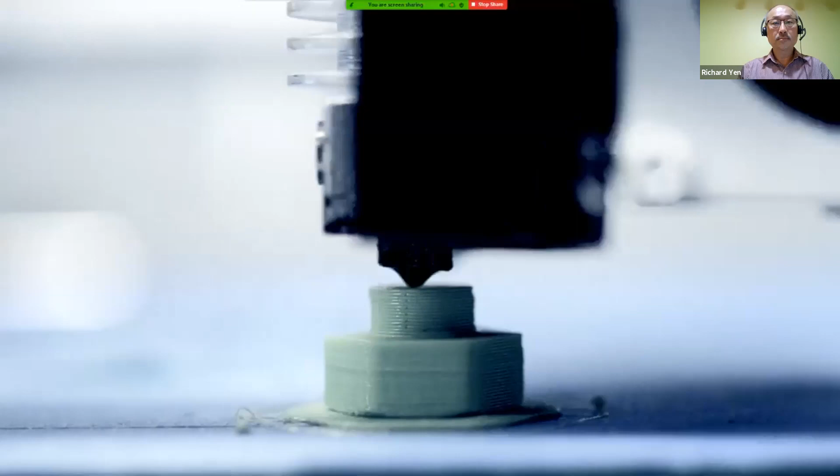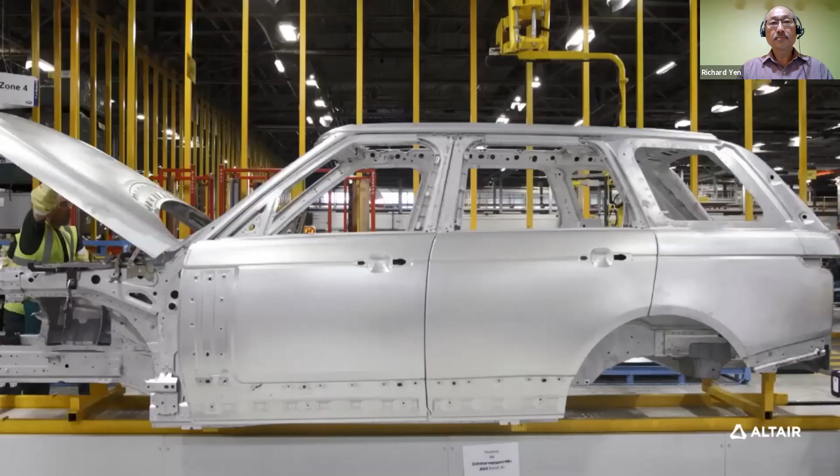Much like the title Enlighten, because it enlightens us on new technologies. They're like a peer to me and to my engineering colleagues, so it's even more of an honor to have a group and a company that's made up of engineers give us an honor like this. It's important for automotive companies to reduce vehicle weight because we want to give customers cars that they want from a ride and handling point of view and an enjoyment point of view, and also cars that meet the sustainability challenge, get better gas mileage and better CO2 reduction. We consider the Enlighten Award as the Oscar of lightweighting. We've been following that for years. We are going to brag about this to all our customers, putting it on our website. We're very proud of this. We had the CEO here today, so we're going to really brag about winning this award.

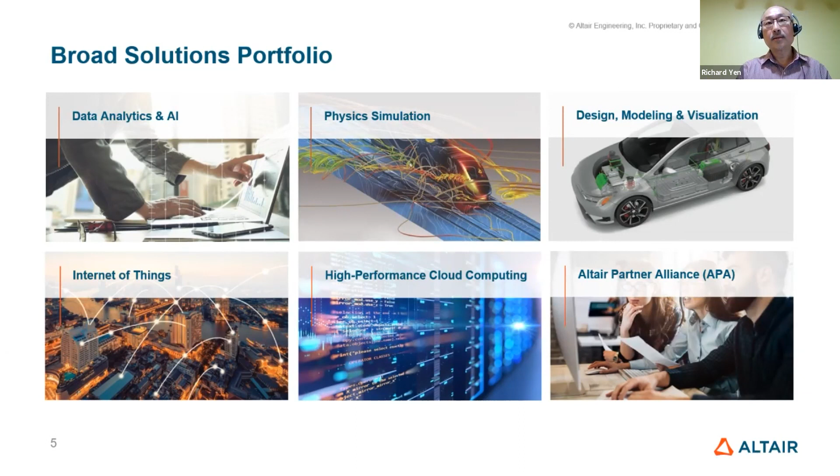So for the Enlighten Award this year, we're entering our 9th year for the Altair Enlighten Award. Altair has been very happy collaborating with CAR, using independent judges to judge the entries. So I want to remind everybody here, the date is May 31st.

That's when entries close, and then we will go through the judging and review cycles. CAR is going to help host the judging panel discussions and select the finalists.

And then we will present those awards at CAR's MBS on August 4th. So what's the difference for this year's award? We understand that through the years, the Altair Award has already extended beyond just vehicles, into modules, enabling technologies, and the future of lightweighting.

We understand that for OEMs to achieve their goals, it requires supplier support and people who have a vision for lightweighting solutions. So we're adding the module category, enabling technologies, and the future of lightweighting.

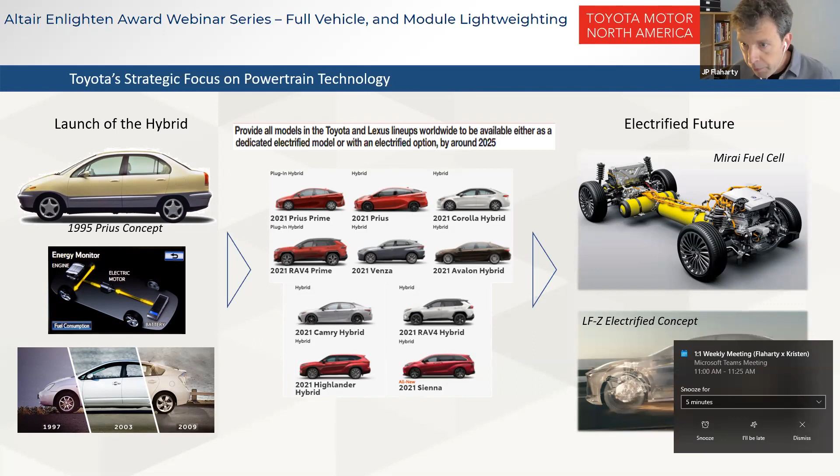If we talk about weight reduction and some achievements, we have the first Altair Enlighten Award that we won in 2017, for the resin liftgate for the Prius Prime, the plug-in version of the Prius. The technology is a CFRP inner panel with glass fiber reinforced molded SMC structure that's 40% lighter than equivalently sized aluminum. More importantly for us, it gives the customer benefits: unique styling with aerodynamic advantage, and mass offset that allows a larger battery and thus longer range for the driver.

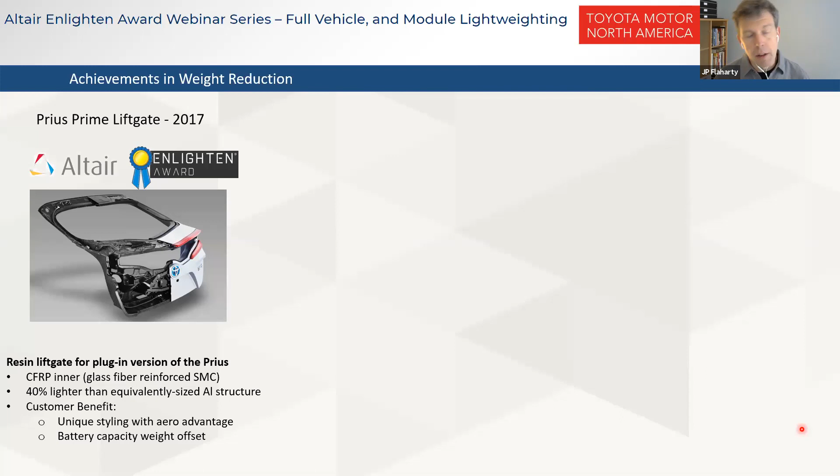In 2020, we again won an Altair Enlighten Award, this time for a project developed here locally within TMNA R&D, with strong collaboration with our supplier partner BASF. This is the resin seat frame for the Sienna minivan that utilizes a glass fiber reinforced resin structure that's 30% lighter than the prior steel structure. We were able to manage cost through considerable reduction in part count, integrating many subcomponents into the structure itself. The key advantage for the customer is ease of use—it's very light and easy to fold and unfold these third row seats in the new Sienna.

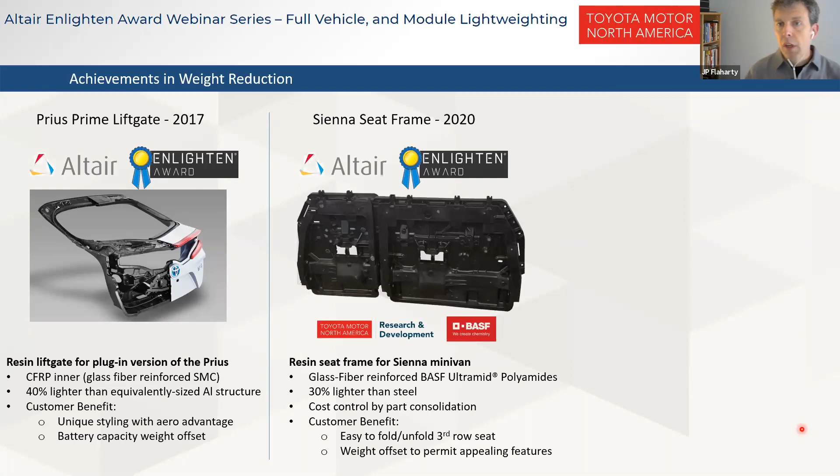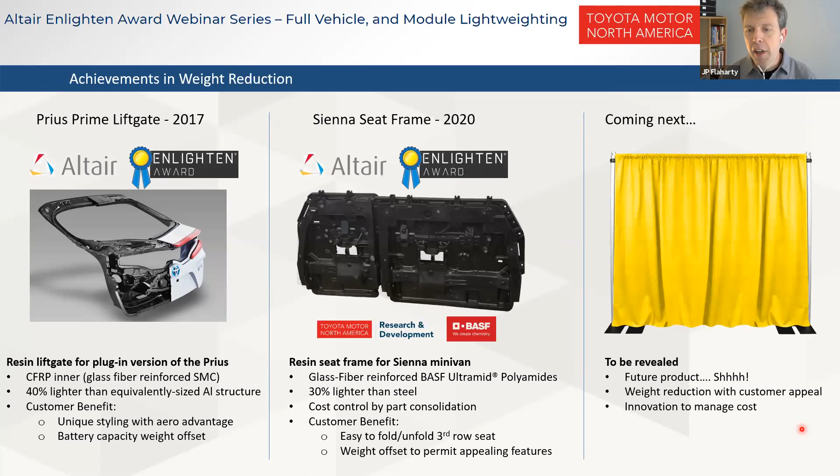So what's coming next, what's behind the curtain? I can't talk about future product, but I can say that we are definitely working on new and compelling innovations that will be revealed in due course, following the same pattern of weight reduction focused on the customer, with innovation to manage some of the side effects of that.

So finally, let's talk a little bit about the big picture and how we bring that down to our local operations and R&D. Toyota is on a quest to reform our company to become a mobility company. There's lots written about this and lots to see, with all sorts of interesting things going on within the case definition. This is a revolutionary transformation, not just for our company but for the industry as a whole, with change happening everywhere that's affecting all corners of the company, and that does include us.

We have reforms that we are working on to manage this change in our core vehicle development work. One of the ways we are doing this reform activity is by looking at four different categories.

Number one, we will never stop identifying and closing quality gaps and maintaining that customer-first mindset. Toyota realizes this is the secret to our success, and we have to maintain the quality, safety, and these attributes of our vehicles that customers love. But we also think about where our approach is just right, where we can say it's good enough, and also where we need to exceed the customer's expectation—what attributes, what design elements do we want to overshoot the requirements on to really make a strong impression and strong value for the customer.

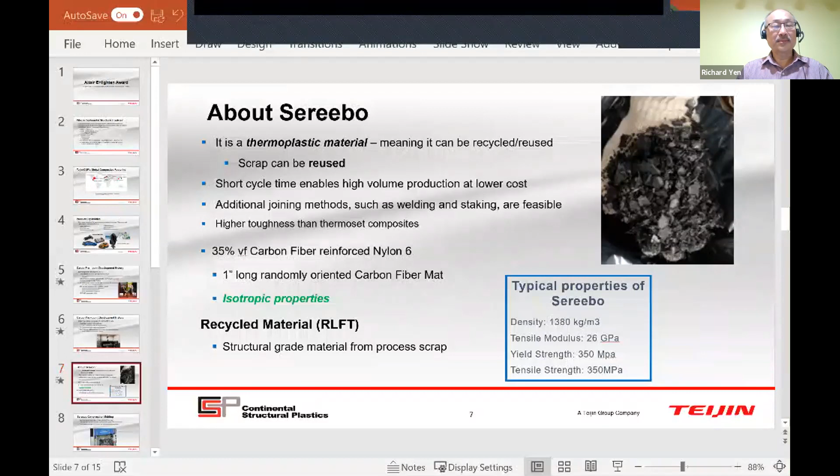So our product capabilities, again, many apologies. Battery boxes and carriers is turning into a large business for us. Pickup boxes, we do many different pickup boxes for many different customers. The one we're going to be talking about here is GM, the Carbon Pro. We also do pickup boxes for Toyota, for Honda, and we're in development with several other OEs for some pickup boxes. The Class A body panels is huge for us. Marine outboard motors, we do all the Mercury Marine outboard motor covers for all their engines. A lot of underbody components, structural components, interior panels, as well as building and industrial components.

Carbon Pro, which is the main focus of my presentation here, goes way back to 2011. It was between General Motors and Teijin. GM and Teijin actually located their engineers here in this facility that we're in right now for our development center. We did the trials, we learned about the material here. And then CSP joined the development when Teijin acquired us.

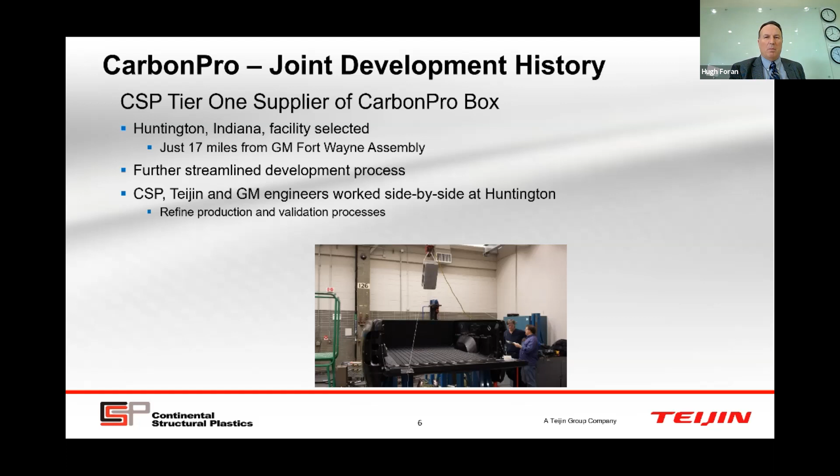Sereebo is a thermoplastic material. It's a nylon material with 35% carbon fiber. It has 1-inch random carbon fiber mat. It has isotropic properties, meaning it has basically the same strength and stress in all X, Y, and Z directions. We also use some of the offal from the material, we grind it up and then use that to injection mold some of the extra pieces for the box as well. So it is a fully recyclable material.

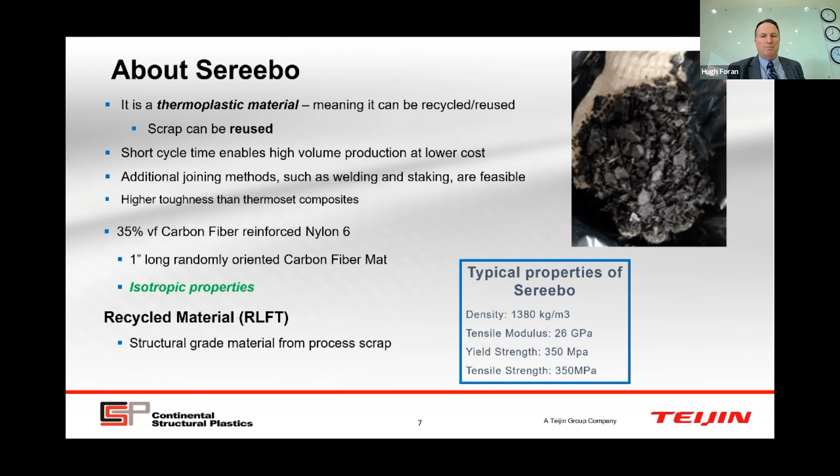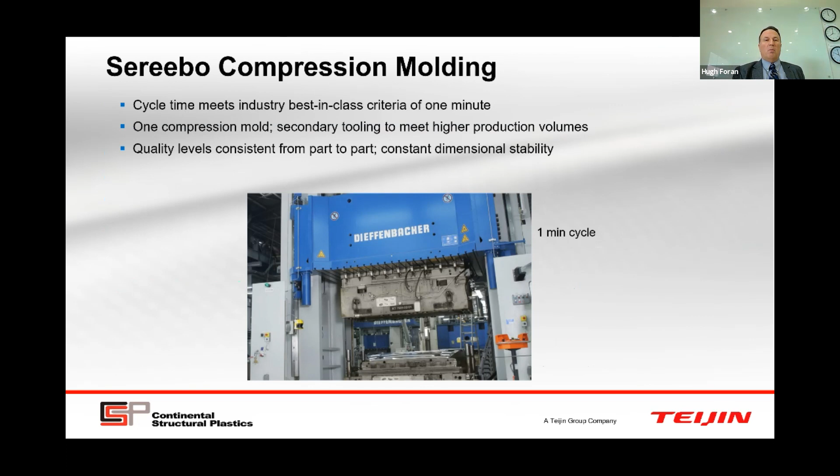We process this under a minute in a compression molding vertical press down at our Huntington, Indiana facility. The quality levels, because of the tools, were very consistent and very dimensionally stable. We processed this in under a minute. This was the industry-first carbon fiber composite pickup box. It has very high strength and durability, it's UV resistant, and lightweight — it's 62 pounds less than the comparable designed steel bed. So it's a huge weight save. Also, by using this, you don't need a bed liner with the pickup box.

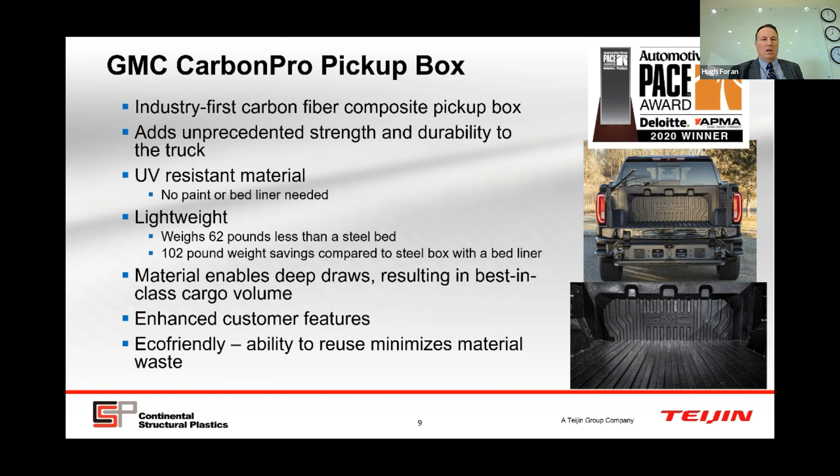I'm going to show you the video that I have here very quickly.

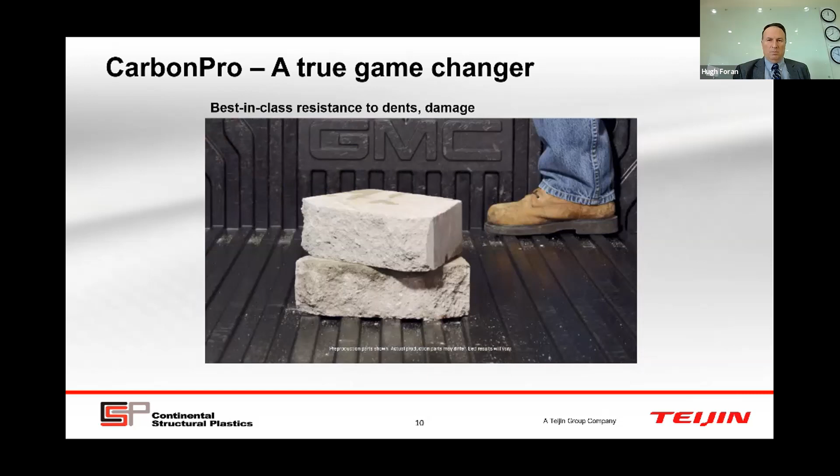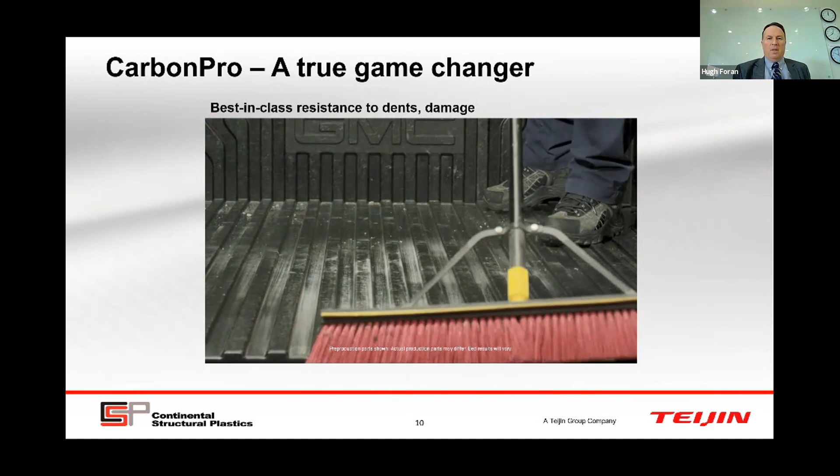With that video, you can see that there's no damage to the box really, and you don't see any holes in the bed. Also, those drums were filled with water. This really exceeds the requirements of any pickup truck that's out there.

Also, we're now working on honeycomb panels and extreme shapes. We're working on Class A exterior body panels in development right now that have shape, but end up being even lighter than regular SMC panels. In terms of lightweighting, we're able to down gauge the outer skins, whether SMC outers or thermoplastic outers. As we down gauge, it reduces the cycle time needed to cure those materials, and all these processes are under a minute in cycle time, which greatly reduces the cost.

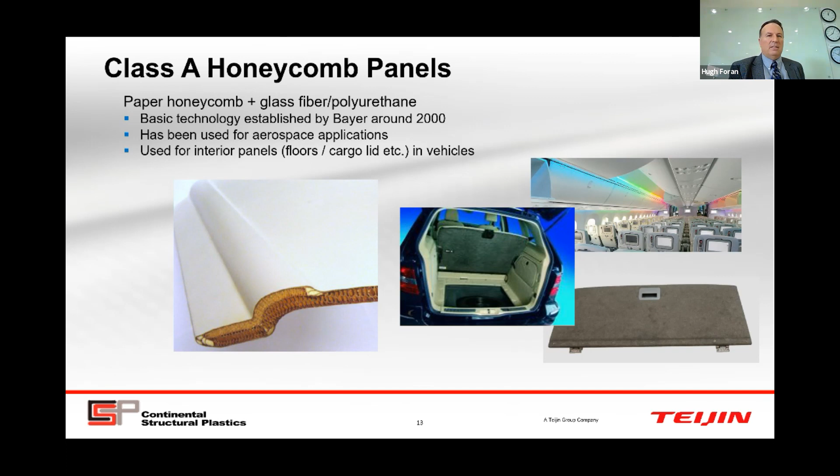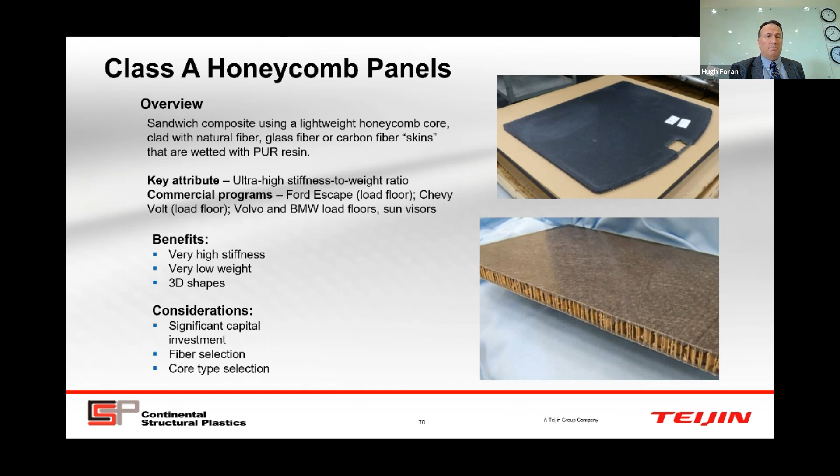This gives you some more information on the composites for the honeycomb panels. We've been playing with many different types of outer skins, whether thermoset or thermoplastics. We've even played with carbon fiber outers, and it's generally a very strong part that's now even capable of going through an E-coat oven. This gives an example of some shapes we can mold into the part, but we can also create unique shapes and do a complete floor pan if required.

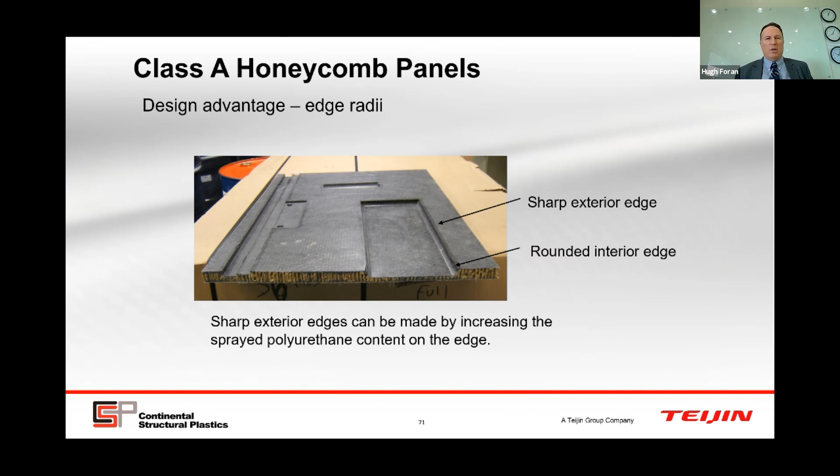That's the end of my show.

Thank you, Hugh. While you were showing those new materials, especially Carbon Pro, which is an industry first, how does a company like CSP or Teijin convince the OEM to use a new material, because the car could last a long time and has to go through so many stringent use cases? Really, it depends on the design requirements of the customer.

For the last 20 years, I'll use Toyota as an example, we supplied the Toyota Tacoma pickup bed, a medium duty truck. We've been supplying a composite SMC pickup bed for that for the last 20 years. It really depends on the customer's requirements.

GM went out and put requirements together that exceeded anything else. You probably remember the commercials between Ford and GM dropping blocks in the back of the beds and putting holes in the beds. They wanted something that exceeded the military grade aluminum Ford had, and the steel bed GM had—something way over the top. We were able to meet those requirements with the Carbon Pro box.

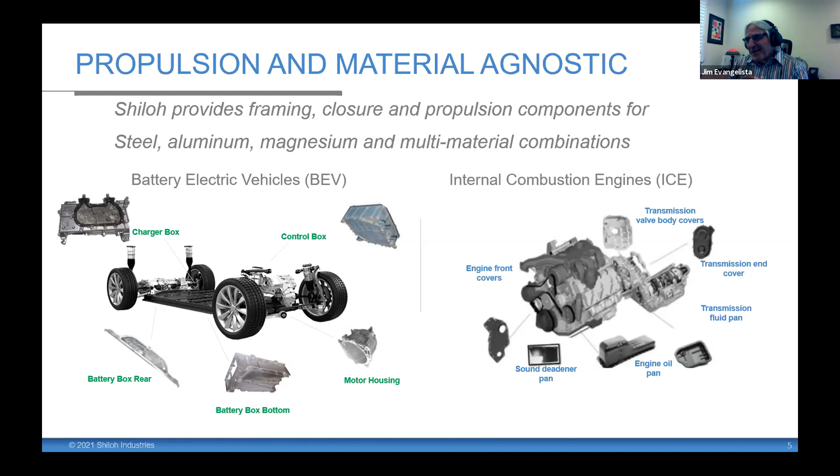The parts that we're looking at, we are also agnostic to the powertrains. Things that we've done for internal combustion engines, we can also do for battery electric vehicles, for chassis and body structural type components. So it's pretty exciting times as the times change and we see more and more battery electric vehicles coming in. There's a lot more opportunities out there.

To do this, we have an innovation process, and that's basically what we do: we take the process and we ask ourselves, is the concept technically feasible? Does it fit our strategy? And then the most important thing is, what's the value proposition? It's going to make a business case, and are we going to be able to price it properly to get market acceptance? This technology innovation roadmap we call STIR, and basically it's a phase gate type of approach.

At each one of the gates, as we finish a phase, we ask those questions again. Is the market still there? Is the technology still there? Have we now, from a production standpoint, looked at whether we're going to be competitive from a pricing standpoint where we need to be in the market? And that's how we look at all of our innovation as we come down.

The most important thing is phase 3.2, the pilot production. How do we scale up something that we did in the laboratory to make it really something that's profitable and adds value to the environment and consumers?

The product that we're going to talk about here was a 2019 finalist. We didn't get the award. We were kind of sad. You know, it's the way life is.

Our customer came to us, and we do a lot of oil pans. We've been doing these for probably 30 years now, making laminate oil pans. We've developed our own proprietary laminate, and they came to us and said, listen, we want to reduce weight, we want to reduce noise, we want to also really match the thermal expansion between a cast aluminum skirt that we're putting on the engines now and the oil pan itself, which will improve sealing durability. And so they came to us and said, you're making steel laminates, can you make an aluminum laminate?

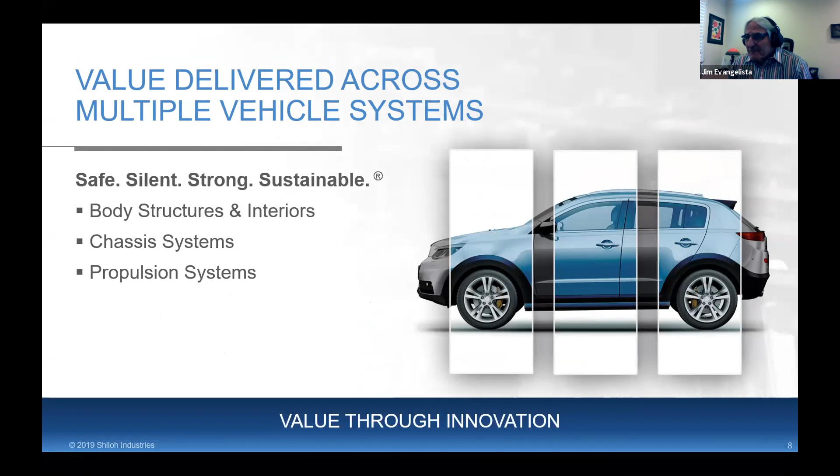Richard, you're on mute. Thank you, Jim. Jim, I have a question.

This is an industry first again, with the new process. Does your company have a good process to really warrant this innovative process so that you can go through all the challenges you just mentioned?

Yeah, what we do with all of our innovation processes—and this was a good one because there was customer pull for this. The customer came to us and said, 'Hey, I want to have an oil pan made out of aluminum laminate. What are the challenges?'

So we go back to the process that we had, which starts with the idea. We evaluate the idea and ask, 'Is it technically feasible to do this?' We said, 'Well, yeah, we think it is.'

So we do some coupon development, and then we go through and ask, 'If I could do this, what would the process look like? How much would it cost us? And is it really feasible from a marketing standpoint to price this product into the market?'

With this one, it was really interesting because it came out to be cost neutral. The steel oil pans came in heavier, and they had to be e-coated from a corrosion standpoint.

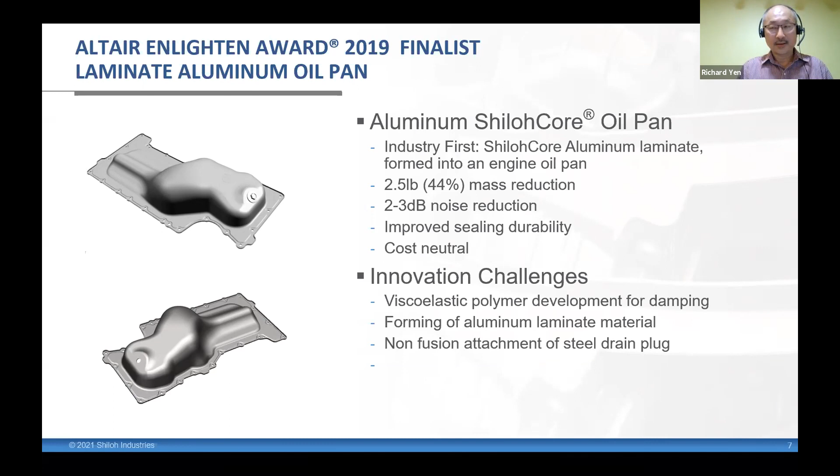The next thing I'd like to get through is that I'm seeing quite a few questions coming in, so let's pick some of those and answer them. A lot of questions are on composite materials, and also one question on the giga press that Tesla has done. Let's go through those.

This is quite interesting, Hugh. When you were presenting the material for the body panels, one of the audience was interested in the repairability. How are you going to make it easy for the users, and how costly could it be?

Actually, if you're familiar with Bondo, the repair material is basically the same resin system that we use for our Class A body panels. It's a polyester-based resin with fiberglass, using 1-inch chopped fiber.

So for the Corvette body panels or Class A body panels, if it's small damage, they're very dent resistant. And if you did have damage, it can be repaired simply—body shop guys are very familiar with how to repair and work on that.

Even with the composite pickup boxes, we actually at one point had a repair kit for the Toyota pickup box. But then we found that box was so tough that there was really no need for that repair kit.

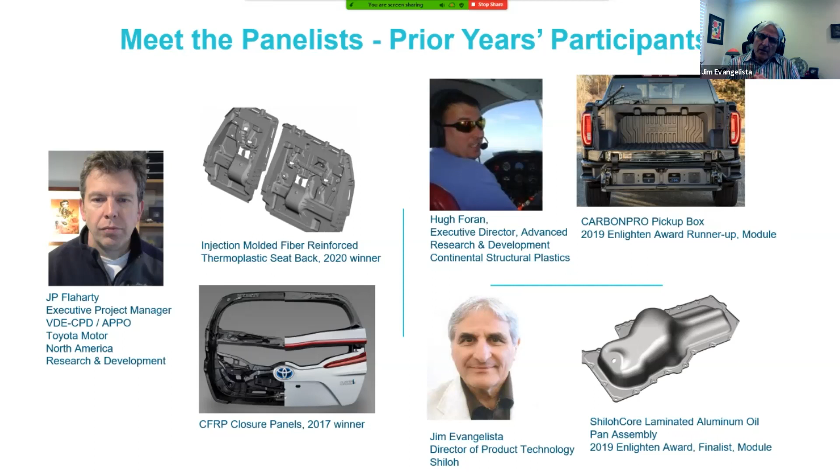Jim, any comments on those? Well, I think from JP's standpoint too, it depends on the vehicle targets. What are your targets? Then you look at that and you got to balance it out and say, what are my options to meet those targets? A lot of these new materials being developed from the steel side, even from the aluminum side, and the processes we're doing it with, are going to give us a bigger toolbox and a lot of options to look at. But when we look at that thing, because we're material agnostic, I've worked with NanoSteel, which I think has now been purchased by US Steel, but they're 1,200 megapascal, 50% elongation type of material. It's really interesting to look at. You have to learn to use it like everything else, but then there's some really good aluminum alloys coming out there. Some of them right now we have to warm form, but we're hot forming the boron steel.

So you look at those things and say, what makes the most sense for the vehicle targets and the cost and the weight and the performance that we get. Some of those all aluminum bodies you see pushing out there are really ride handling type, higher value type vehicles. I don't think we're going to see the all aluminum Pinto type of vehicle out there, but it's a balance, and we got to look at plastics too. Just like Hugh was saying, there's advantages to that, and in the right application for the right vehicle and the targets, it's going to make the most sense to do that.